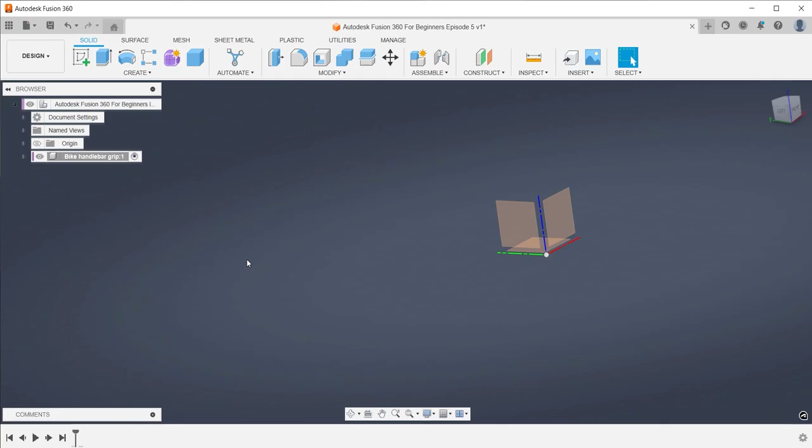Create a new sketch on a vertical construction plane. Fusion 360 will adjust your view. Activate the circle command with keyboard shortcut C. Type a diameter and press enter. You jump straight from sketch to the extrude command when you press keyboard shortcut E. Type a length and press enter to finish the foundation for your bike handlebar grip.

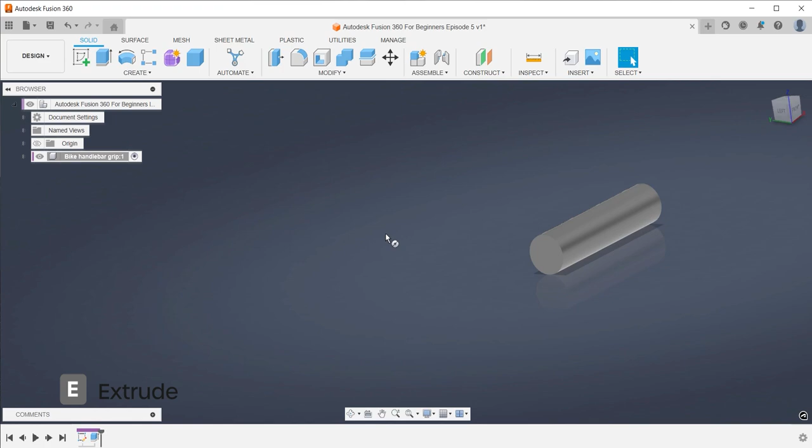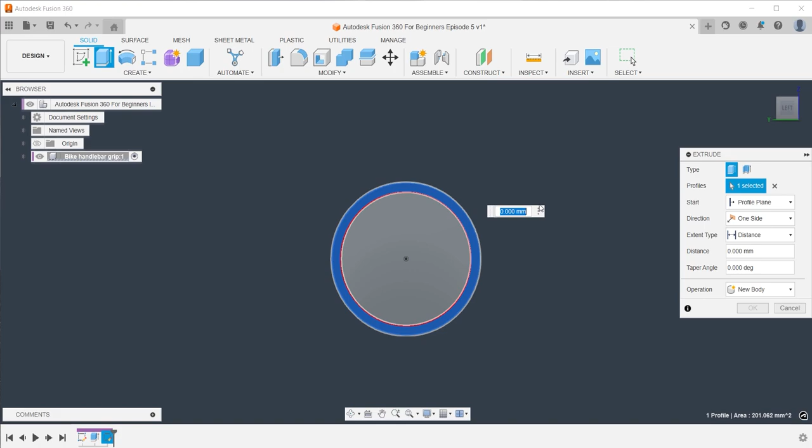Create a new sketch on the short end of your bike handlebar grip. Create a circle with the same diameter as your bike handlebar grip, and create a second circle that is slightly bigger. Press Fusion 360 keyboard shortcut E and extrude the area between the circles.

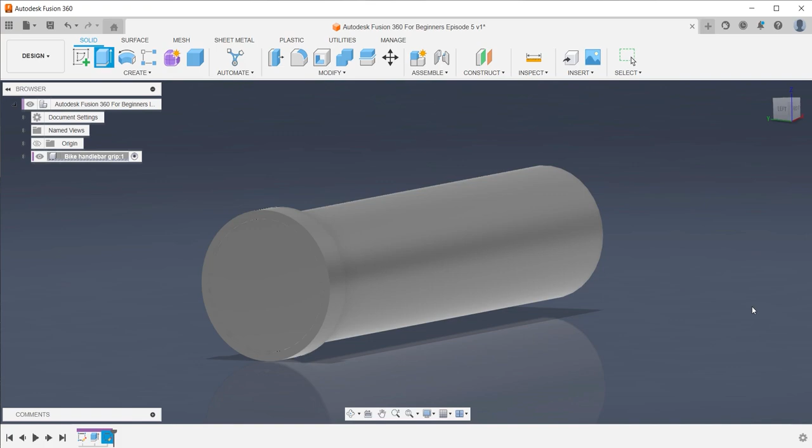It is very important that you change operation away from join. I'll go with new body in this tutorial and keep this part within the same component. Measure the remaining distance to the other end of your bike handlebar grip. Press keyboard shortcut M to activate Move and Copy and create a new copy at the same distance you just measured.

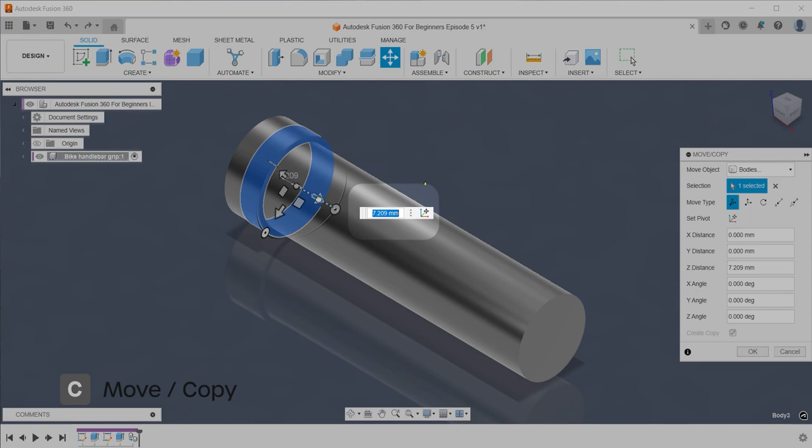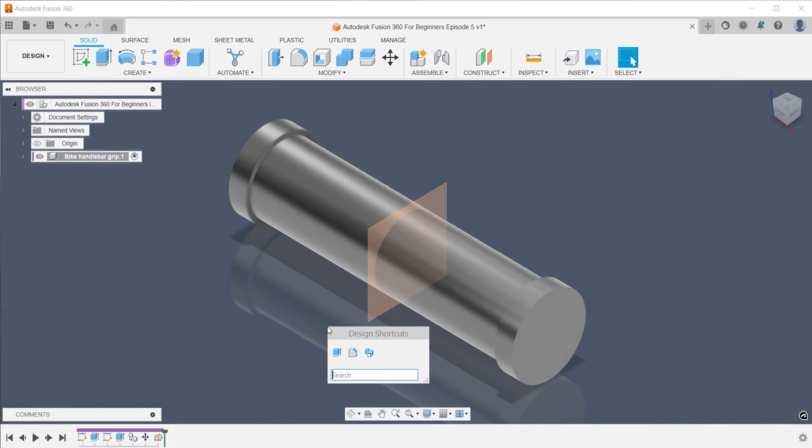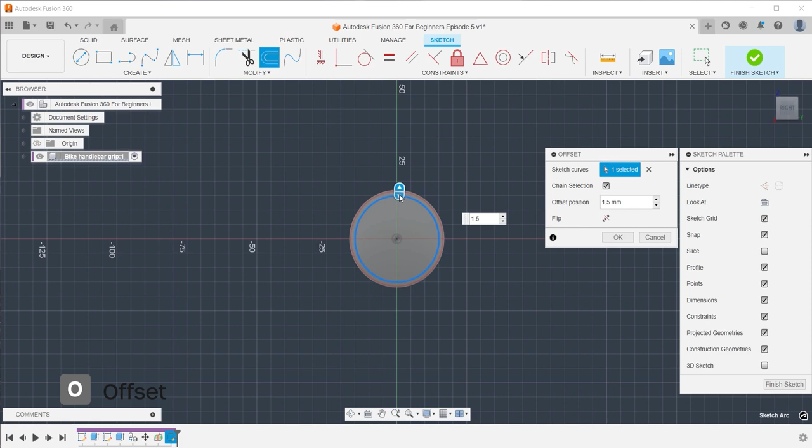Don't look for the middle. Use a midplane construction plane. Create a new sketch and create a circle with the same diameter as your bike handlebar grip. Use offset and create a slightly bigger circle. Finish your sketch and take a look at your design.

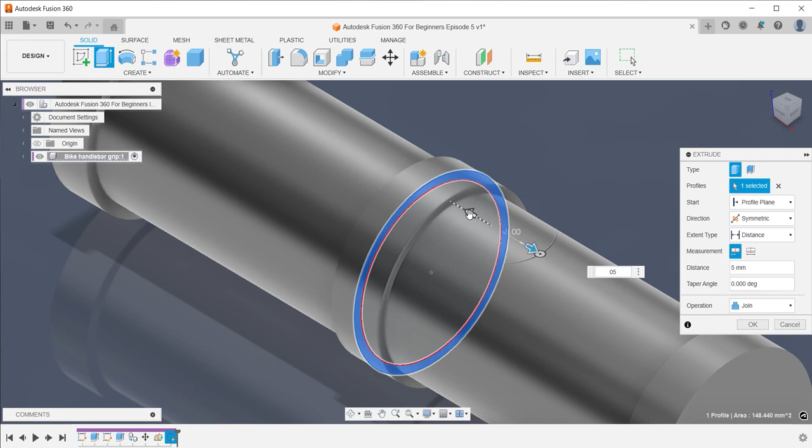You have the opportunity to create symmetrical extrude directions in Fusion 360. Set your symmetrical extrude distance. Explore different distances and pick one you like. Make sure that you change operation away from join. You want to be able to manage this part as a separate entity and not as a part of your bike handlebar grip.

Use measure to find the distance between your middle part and the parts on your end. This is also an opportunity to control measure your symmetrical extrude.

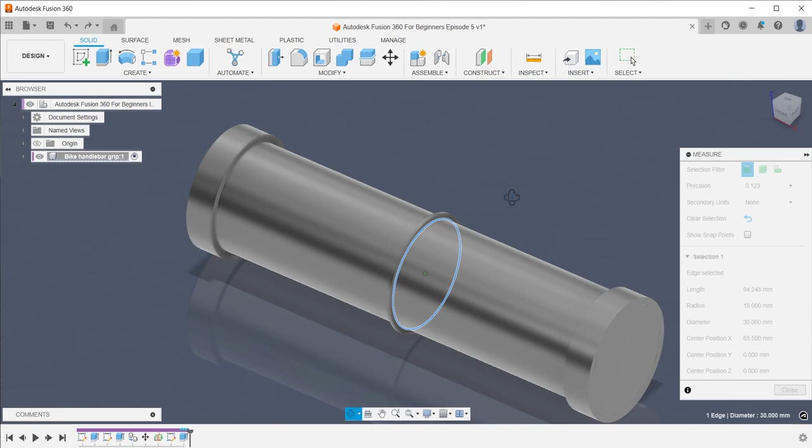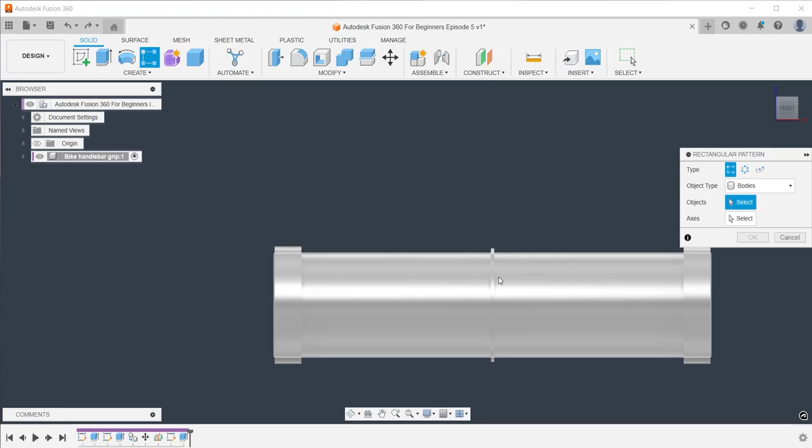Position yourself with the view cube and use Fusion 360 design shortcuts to create a rectangular pattern. Select your object, your axis, set distribution to extent and change direction to symmetric. Add your measured distance and increase the quantity. Make sure that you choose an uneven number so you have the same distribution on both sides.

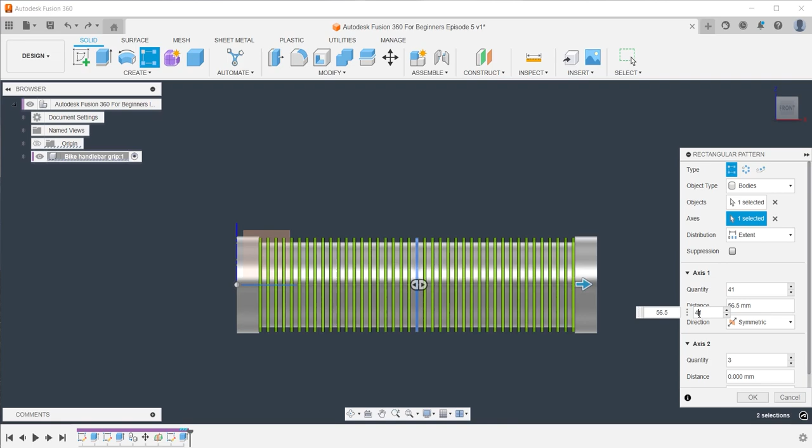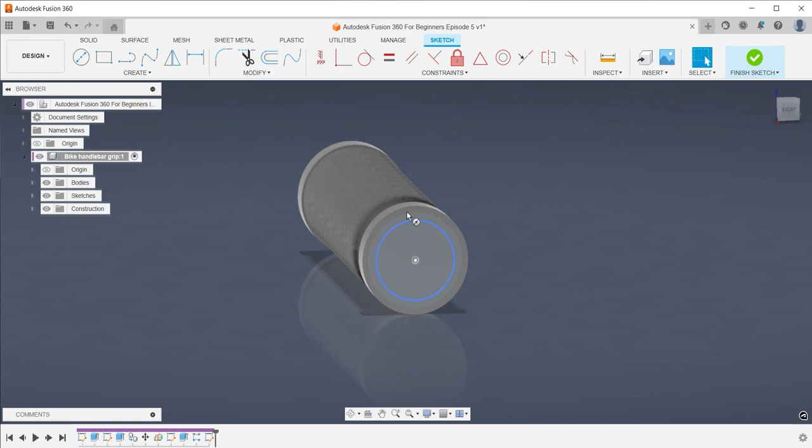Create a new sketch on any side and press keyboard shortcut C to activate the circle command. Press keyboard shortcut E to activate the extrude command. Change extent type from distance to object and pick your other end as object. Hold down Shift and press down your mouse wheel to orbit around your design.

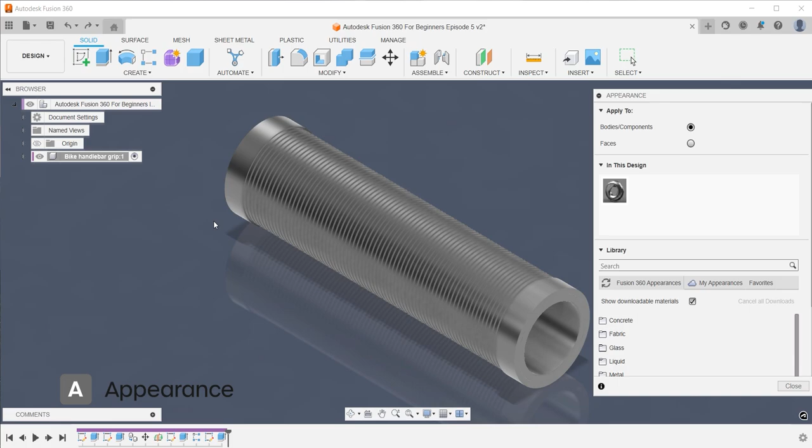Activate Appearance with keyboard shortcut A. Select multiple bodies in the browser and drag and drop your appearance for selected parts in one move. Search for another appearance for the handlebar grip. When you select two bodies and hold Shift, all the bodies in between are selected as well.

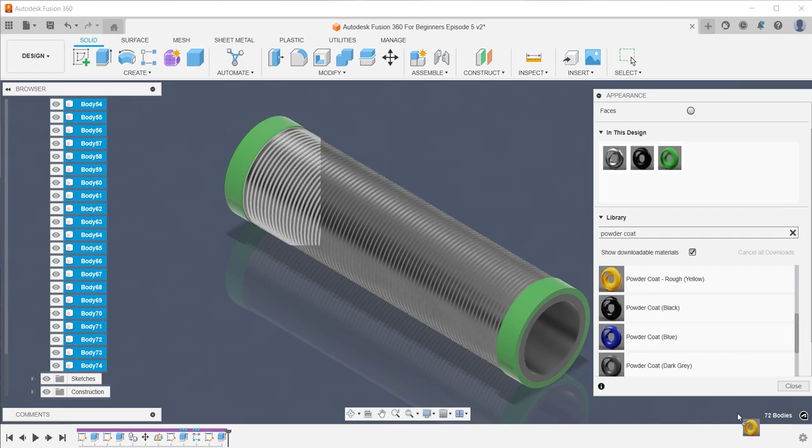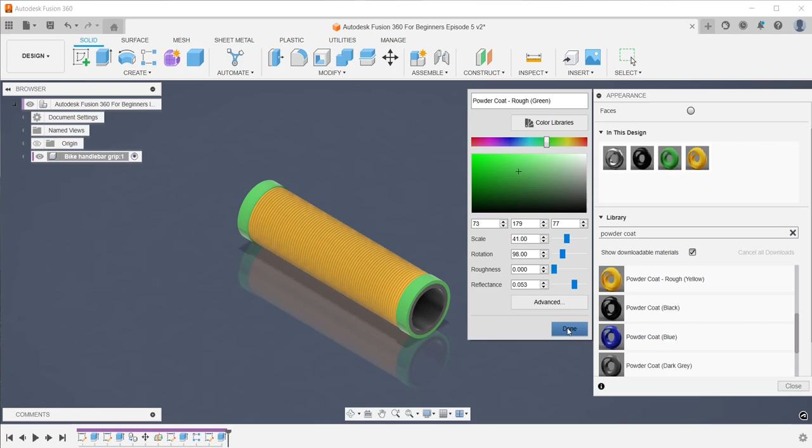No worries if you mess up, you can always fix things. Right-click on your selected Fusion 360 appearance and choose Edit to fine-tune your color settings. Press keyboard shortcut Escape to close down the appearance menu. Finish your design with a color for the middle part.

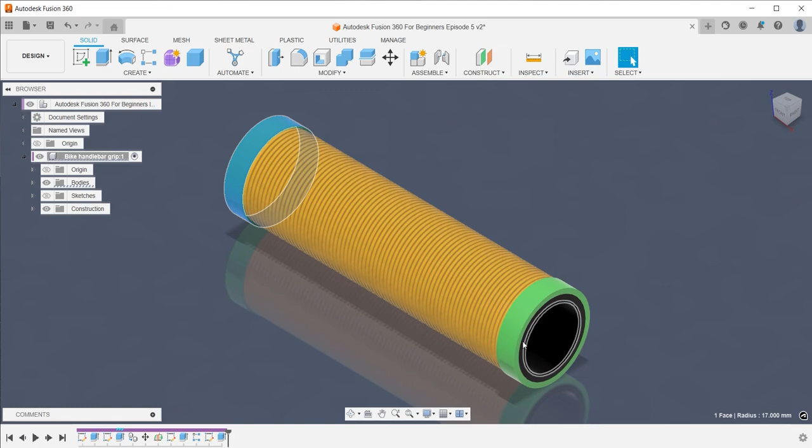You can use the timeline to go back in time and edit your solids. With Sketch turned off, you won't see the corresponding sketches when you press the timeline. Turn Sketch visibility on, and you will see the relevant sketch when you press the sketch icon in the timeline. Select Edit Sketch from the timeline.

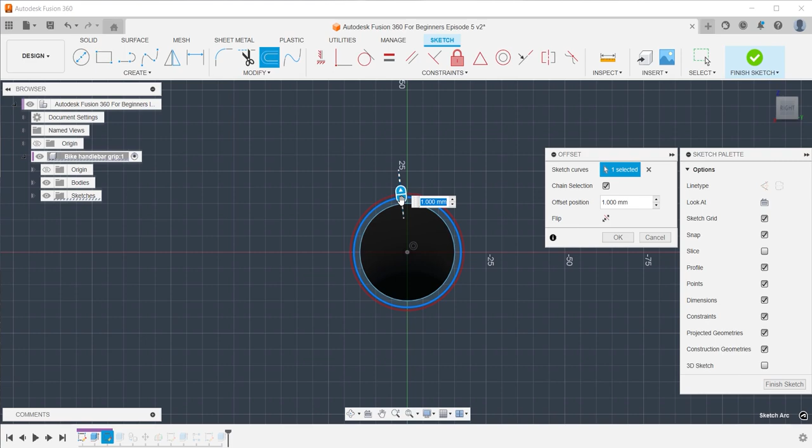You can use Offset to increase your diameter, and just select your previous boundary and delete it. When you finish your sketch, you see that later actions in the timeline, in this case Extrude, are updated based on your updated sketch.

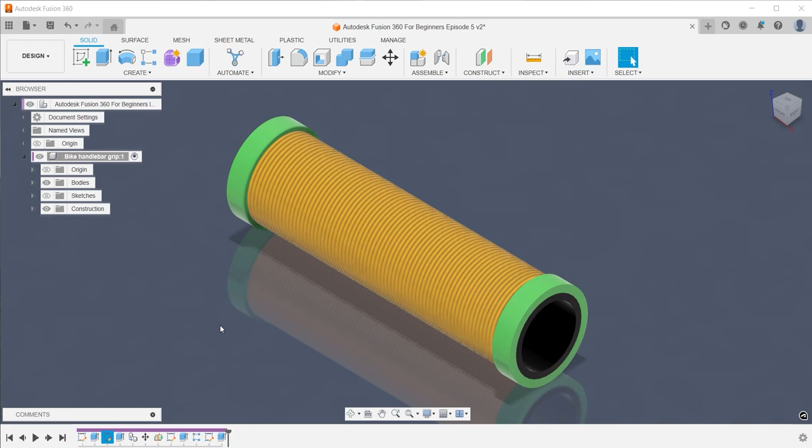Use direct modeling to give your design a final touch. A soft finish where you have your hands is appropriate in this case. Fillet, keyboard shortcut F, is a great option for this. Use the View cube while you are in the Fillet command to find your edges for that final touch. Bravo!